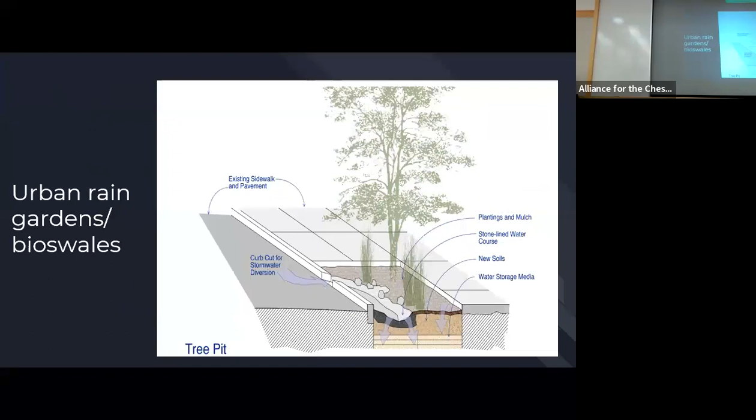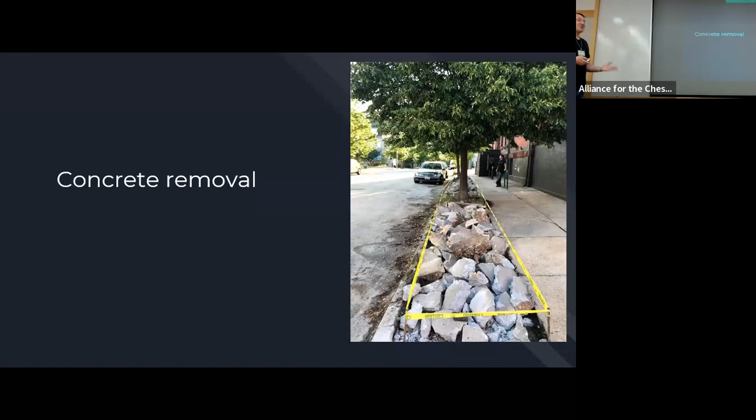Concrete removal. There is a lot of concrete that shouldn't be there. It's just basically everything seems to be concreted. So there are a lot of opportunities to remove concrete and enlarge the tree pits.

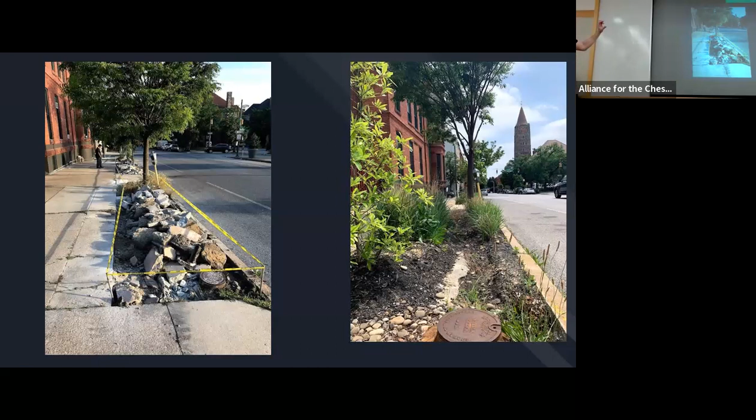Here you see an example of a rain garden that was created in this tree pit with a bunch of concrete. Please take a look how thick this concrete is as well. This is something I would like to address.

Let's close the aspects of urban trees. Why are they important? They are important because they support stormwater management. They can support evapotranspiration and transpiration, which is also very important for mitigating temperature. They provide shade.

We're also thinking there is a strong aspect related to reflectiveness. They can also mitigate temperature, and that would depend on different species.

Trimming is also important, and I know it might not be the right place to talk about stormwater management, but if we want healthy trees in a densely populated urban area, they have to be trimmed so they're not hit by box trucks, for example. We constantly are losing trees to large vehicles.

So moving the canopy up, there's one problem: something called the wind sail effect. If they're trimmed this way, they can actually collapse.

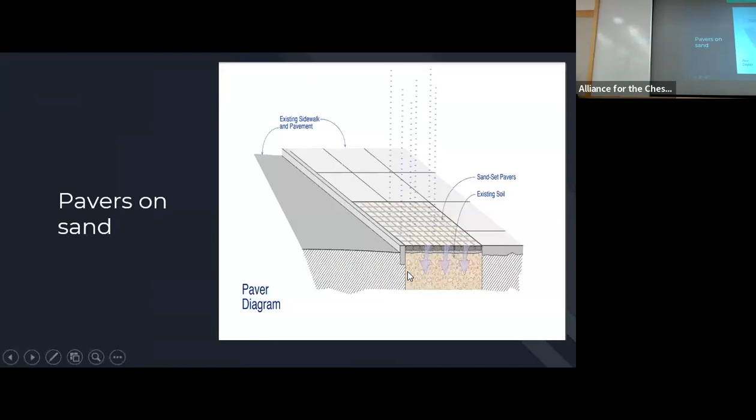So this is another product that we haven't tried yet, but we're thinking it might be very helpful, especially with holding stormwater and allowing the trees to tap into those drain blocks. Again, this is a very simple solution. It doesn't require a degree in rocket science, just to put this, and you'll see in a moment.

Okay, so here you see how they are installed, and this is another option for how we can capture the water for the trees. We haven't tried it yet. This is just basically us applying for some grants to actually try it.

So that would be also something that we would like to do. I'm sorry, I forgot how many gallons, but it's a very large amount of water that could be held and intercepted, at least partially, by trees if they're combined. So here's a drawing showing how those rain gardens providing water can also provide water that could be stored and used by the trees using those drain blocks.

Soil improvements and compaction prevention, that's also a problem. A lot of how we are planting our stuff - we use a lot of strawberries, so it's basically sustainable. We don't want to put a lot of fences, rather natural solutions, and that keeps either dogs or people from walking over the tree beds.

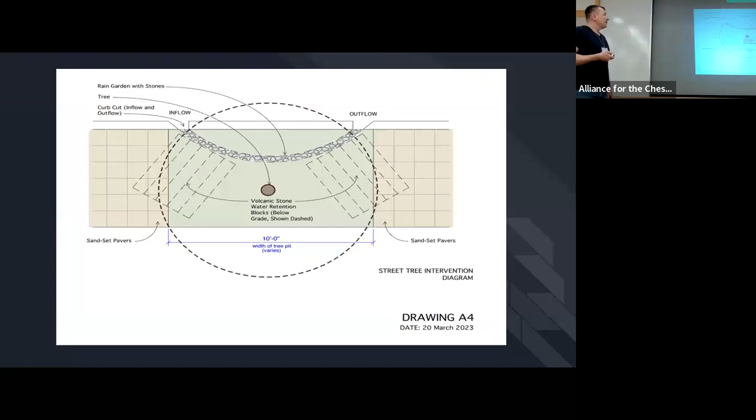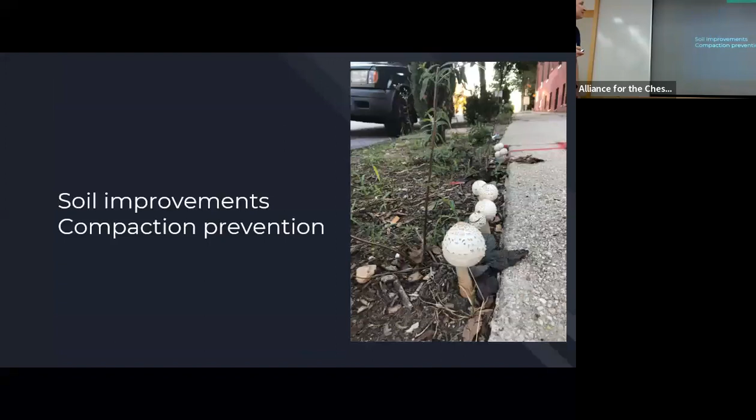Go ahead, can you go back to what the blocks look like? Sure, the collisions - so no, not those blocks, for preventing collisions, it looks kind of like a bike rack. Yep, what are they called again? I don't know, I just saw them on the streets when I was walking, and I said, 'Oh, this is really good for the trees.' But they use simple bollards.

I think I talked to someone also in places like that. Even bollards could be put in the corners - that would keep them away. It's eventually always happening when the trees are damaged, so they can grow for many years, and then that's the end of the party.

Anyone? You had a question virtually about what those blocks are made of that do all that absorbing. I think it's lava or basalt type material, the same material used on the rooftop to hold the water. That's as far as I know.

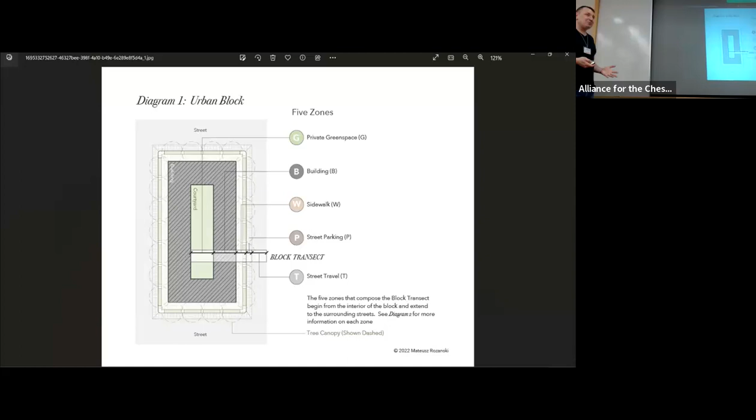Okay, so I also would like to talk a little bit about equity and the design of a block. Here you have a typical Baltimore block that we would like to see evolved into an ideal block. One reason why it's equitable is this web of trees that basically provides thermal comfort in the public space.

The objective is to achieve a continuous mature tree canopy covering the walking areas all the way around the urban block, to provide shade for people and buildings, mitigate the urban heat island created by hard space, and enhance absorption and transpiration of stormwater.

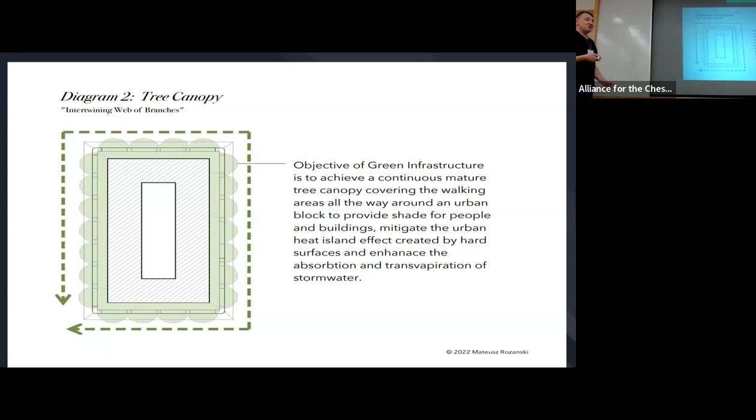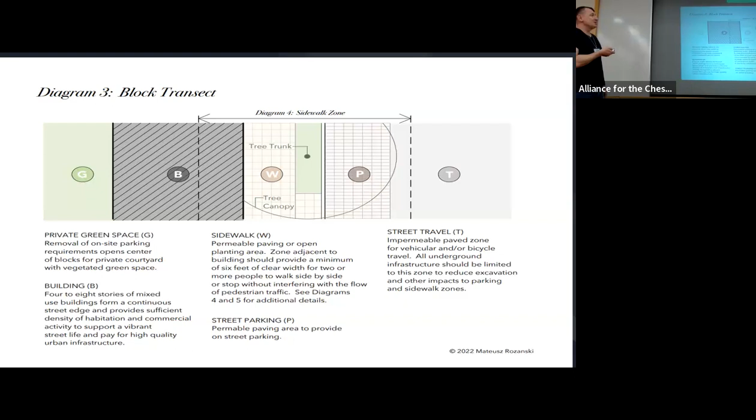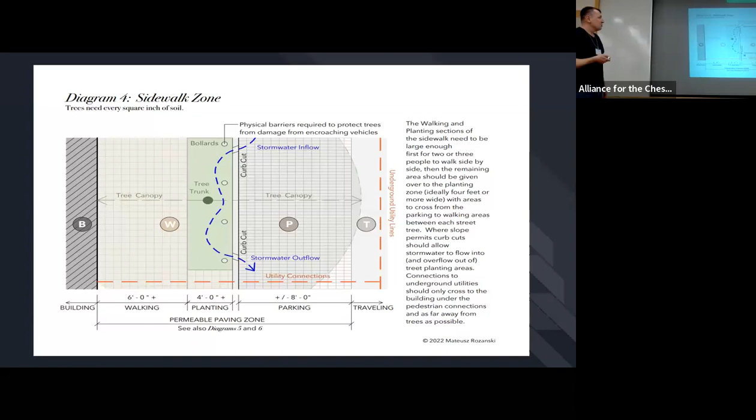It's also very important how those trees are planted. They have to be distributed evenly. Here you have a block transect with the private building, the sidewalk, and what I was mentioning before, a parking space that could also be permeable. This is improved with stormwater management, and that's how it looks. Basically, this parking space gives extra space for the tree and the root system.

Thank you very much. That would be all. Thank you.

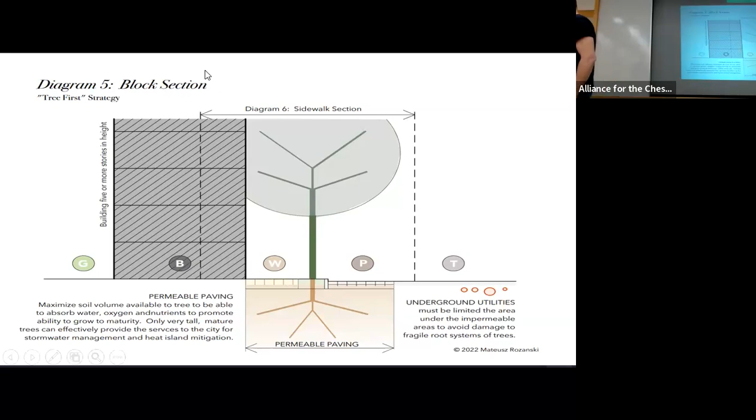Do you have any other questions? I was just curious about the trees, because we're focused on planting trees and then discussing permeable pavers for parking spaces. Have you seen that anywhere where it's been successful? Just thinking about the leaves clogging them.

Yeah, so that's basically the entire Netherlands, where they have problems with stormwater. That's basically a standard—street parking, but also any kind of alleys or small streets.

And obviously, just to be clear, those wider 12 by 12 pavers, for example, are used on the sidewalks. Bricks, where the pressure from vehicular traffic is higher, are used usually where the street parking is. So yeah, but they are permeable.

I have a bunch of pictures that I took. I can share them with you.

Do you know if they can do any maintenance to unclog those? Well, with this experiment that we did, this 100 over 100, they seem to still be permeable despite the fact that a lot of sediment happens.